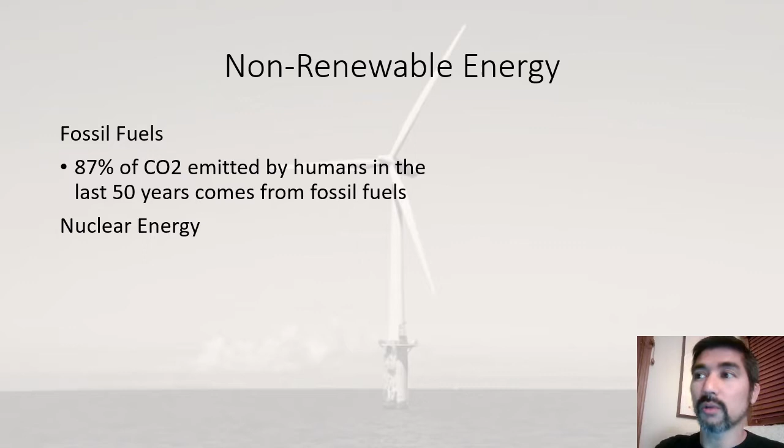Nuclear energy is also another form of non-renewable energy, and the creation of nuclear energy relies on two non-renewable resources: uranium and plutonium.

The way nuclear energy works is pretty much the same as burning fossil fuels, except you use the nuclear decay of uranium or plutonium to heat water. That water creates steam, that steam turns a turbine, and that turbine creates electricity. Same thing with fossil fuels: you burn them to heat up water, that water turns to steam, that steam spins a turbine, and that in turn creates energy.

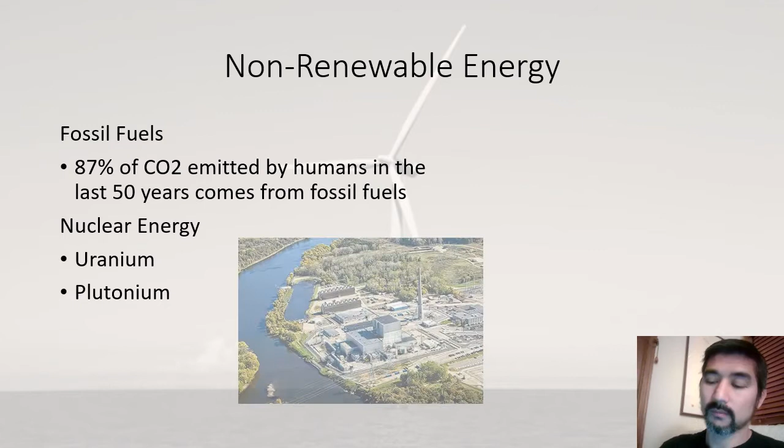One thing a lot of our students don't know is that there's a nuclear power plant very close to Minneapolis, and that's the Monticello Nuclear Power Plant.

This is a picture of the nuclear power plant in Monticello. One thing you'll notice is that it doesn't have the distinctive concrete smokestack, that hourglass shaped smokestack most people associate with power plants. That's not here at Monticello, but they're still creating energy using nuclear fuel, though I'm not sure if it's a uranium powered or plutonium powered plant, or other details about it.

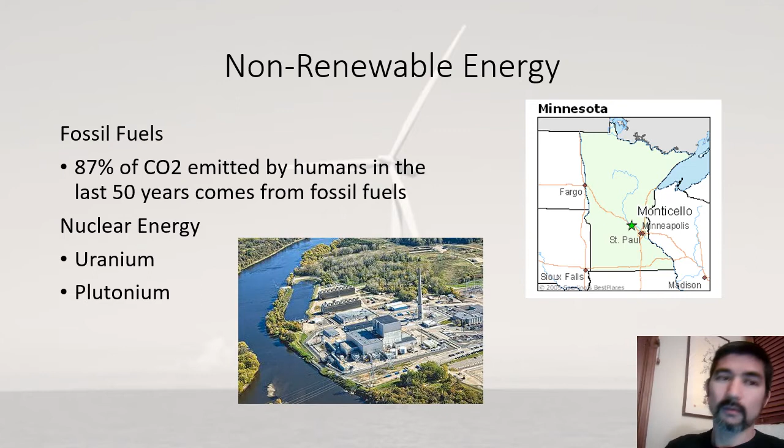Now that we know about non-renewable energy, let's talk about renewable energy. One type that people talk about a lot, which sounds really fancy, is biomass. They'll even have fancy pictures and graphs to talk about what biomass is. Corn or sugar can be mashed up and fermented to create a type of alcohol called ethanol, and that ethanol can be used to power cars.

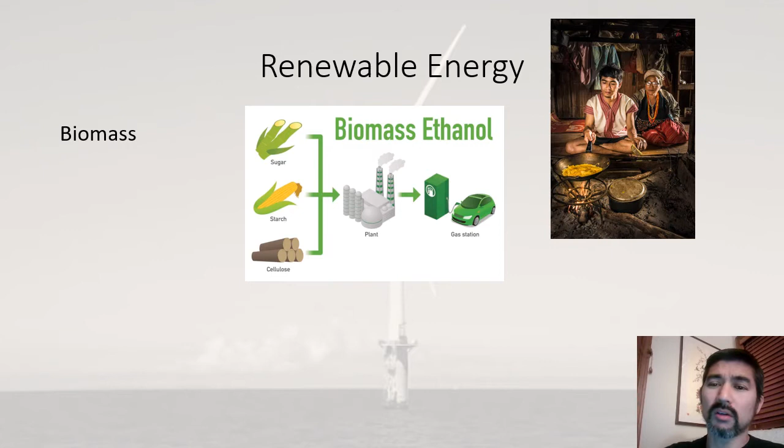But more often than not, when we talk about biomass, we're just talking about burning wood. Burning wood is one form of biomass energy. Wood is a renewable resource because we can cut down plants, burn them, and then grow the plants again. However, burning wood creates a ton of CO2, actually more CO2 than burning fossil fuels.

In Korea, biomass was a form of energy used by very poor people, and still used by some poor people today to keep themselves warm during winter. This is called yontan, which is like charcoal. They create charcoal by burning wood in a low oxygen environment, which blackens the wood and removes some of the chemicals that cause smoke from burning wood. So with charcoal there's less smoke, but it still emits plenty of carbon dioxide and carbon monoxide.

People use yontan to heat their homes, but when you heat your home this way, you run the risk of suffocating yourself because it releases carbon dioxide and carbon monoxide into the air. This is a very common story, especially among older generations, of people who lit their yontan to keep warm during winter, went to bed, and woke up to find family members had died, or knew someone who had died. Anyway, this is an example of biomass. It sounds fancy, but it just means burning living stuff to generate heat or fuel.

Next we have hydroelectric power. Hydroelectric power is simply when you make a dam that blocks off water, and then you use the energy from moving water to spin a turbine. That spinning turbine in turn generates energy. We'll talk a lot more about hydroelectricity, not only in this presentation but also next week.

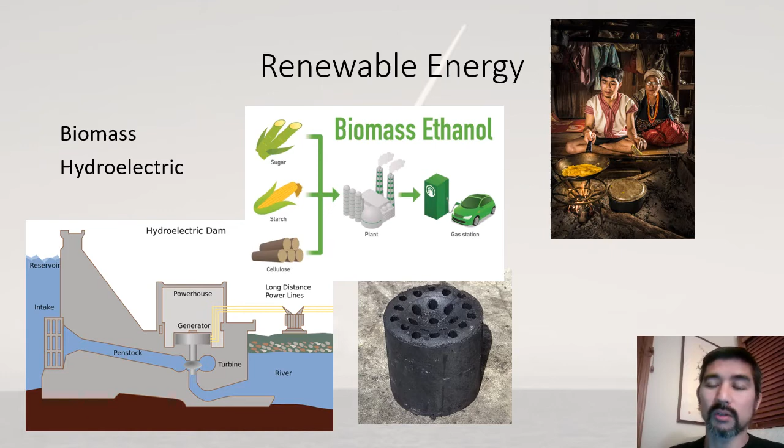Continuing with renewable energy, we have wind—you can see a wind turbine in the background—and wind is one form of renewable energy. Another form is wave or tide energy. This is something I had to look up, because although it's listed as a form of renewable energy, I don't think it's one that people are really channeling resources into harnessing. One of the problems is that you can only harness this type of energy at the coasts, and if people inland need energy, it becomes very difficult to transfer it over that long distance.

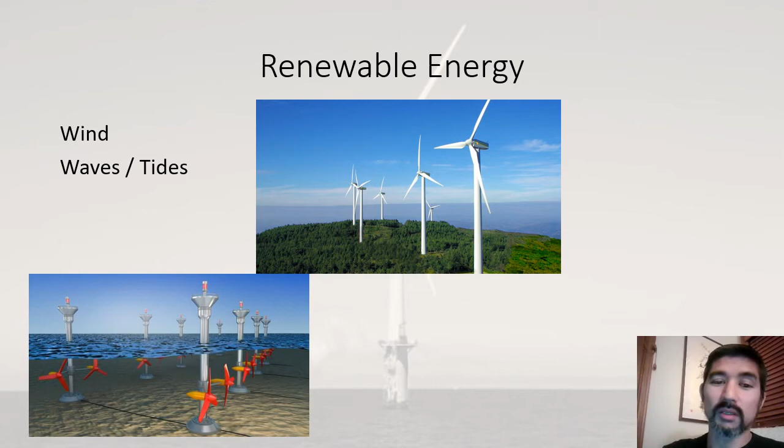Wave and tide energy involves the movement of waves or tides to spin turbines. Those turbines spin and create electricity, which is then channeled out to the land where people can use it. Lastly, we have solar energy.

I think I'm forgetting one more form of energy, which is geothermal energy. That's generated from volcanic areas where the ground is very hot deep down, so they pump water into these hot areas underground. That water heats up and creates steam, the steam turns a turbine, and you get electricity.

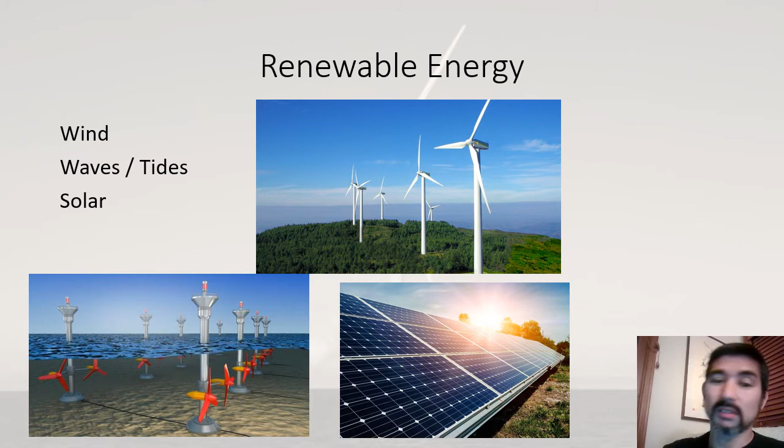Now I want to talk briefly about the problems of hydroelectric power. It's a type of renewable energy, but it has tons of problems. Let's talk about some of them quickly—we'll go into more depth on Monday in a lecture about the Hatgyi Dam.

This is a dam being built in Karen State, a joint venture between the governments of Myanmar, Thailand, and China. Unfortunately, the Karen people haven't agreed to the building of this dam, so there's a lot of bitter fighting over its construction. Also, Karen people are being forced into slavery in order to build this dam.

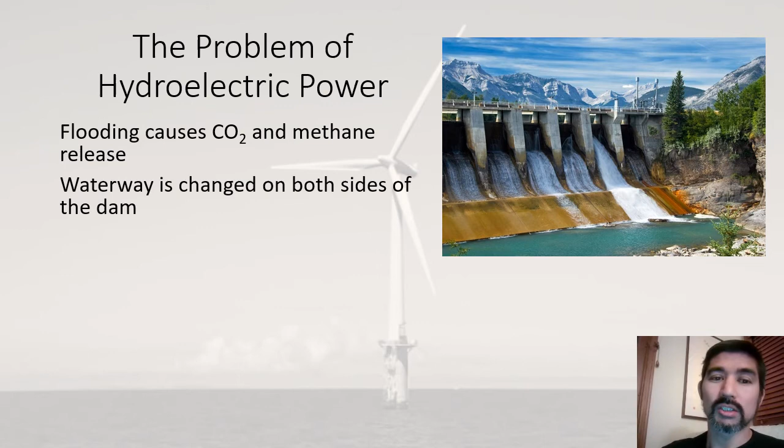Nonetheless, beyond those social and political conflicts over hydroelectric dams, there are also environmental problems with the dams themselves. When you create a dam, you end up creating a floodplain behind it, and flooding that area kills lots of living things, especially vegetation. That rotting vegetation releases CO2 and methane, which is also a greenhouse gas. In addition, you change the waterway on both sides of the dam, creating a lake behind it that holds very stagnant water. The water doesn't circulate much, so oxygen levels drop.

Sediments and nutrients build up, so algae grow a lot. The nutrients and sediments that typically flow down a river get backed up behind the dam instead of being equally distributed along its length. This has a big effect on floodplain farming—a lot of agriculture depends on these sediments and nutrients flowing downstream. When rivers flood, the sediments wash over the land, and when the floods recede in spring, farmers have nutrient-enriched fields to farm on. However, building a dam stops this whole process.

Another drawback of a dam is that fish cannot travel upstream, so nutrients can't travel downstream. Fish and other animals that live in the waters can't travel upstream.

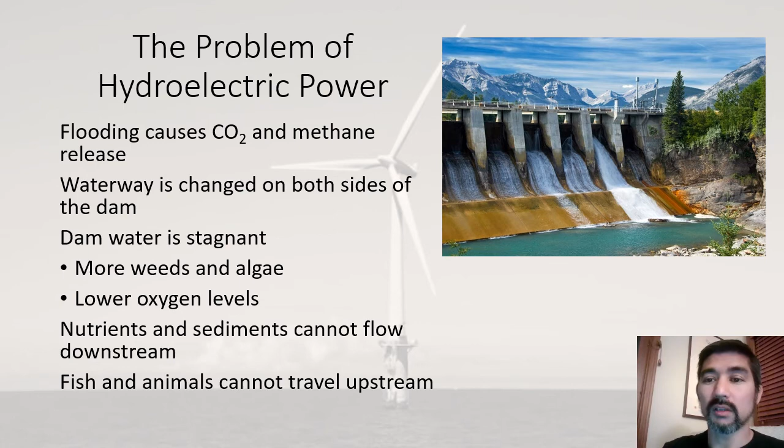Renewable energy also has some challenges. One of the big challenges is that demand for this energy goes up and down, and when you're burning stuff, you can just burn more to meet energy demands.

However, with wind energy, if the wind isn't blowing hard, there's no way to harness that energy. If people need more energy—say it's a real hot day and people are running air conditioners—there's no way to make the wind blow harder to turn those turbines faster to create more energy. So meeting energy demand is a real challenge for renewable energy.

We could even talk about this in respect to solar energy. What if people want to use energy at nighttime? How do we do that with solar energy? So meeting energy demand at different times is a challenge for renewable energy.

Transporting energy is another challenge. I talked earlier about harnessing tide energy—if you're trying to harness energy from waves or tides, that energy comes from the coast or the ocean, and you would need to transport it inland. One problem is that when you're transporting energy, you lose more and more energy the further that energy has to travel.